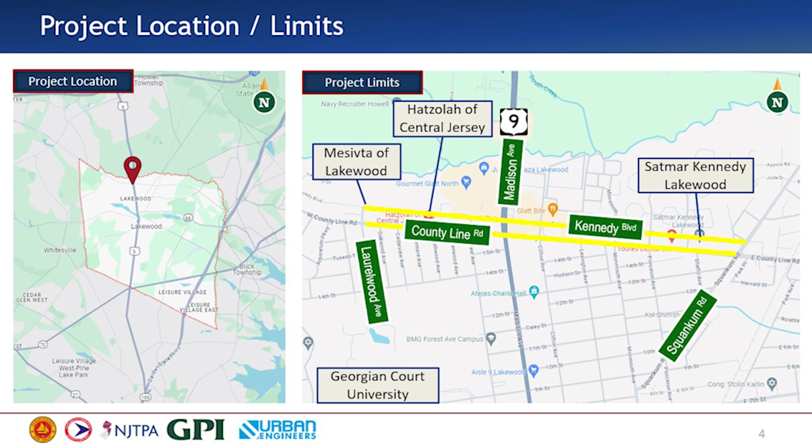The project area is a mix of residential and commercial properties. The project is based on the 2017 Transportation Model Update for Ocean County, which determined that both corridors would exceed their available traffic capacities this year. It included recommendations for adding through lanes along County Line Road and a two-way left turning lane along Kennedy Boulevard.

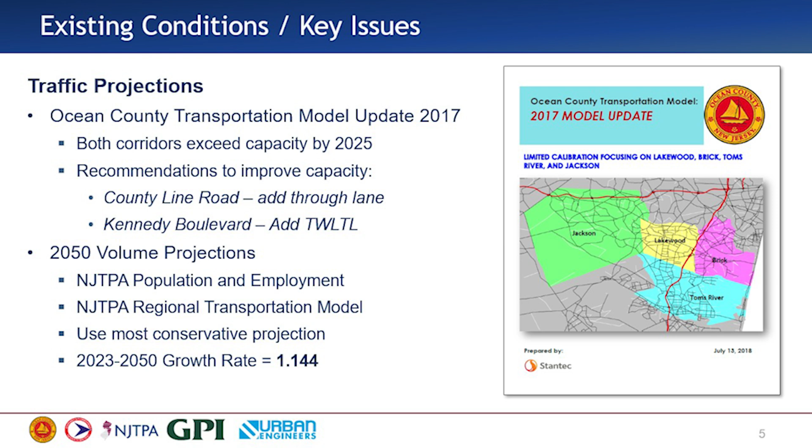Anyone familiar with Lakewood and the surrounding areas knows that there has been significant development and expansion, which is driving increases in traffic, both in the immediate project area and the general region.

As part of our project, we developed a traffic volume growth rate by comparing NJTPA population and employment projections, as well as the NJTPA regional transportation model projections. Using the most conservative figure, we developed an escalation rate, which was used to evaluate our alternatives out to the design year of 2050.

Within the project area, County Line Road consists of 4 and 2 travel lanes west and east of the intersection with Heathwood Avenue, with posted speed limits of 45 and 40 miles per hour west and east of Forest Avenue. The 2-lane section typically features a center turning lane to facilitate left turns on the various side streets.

Kennedy Boulevard consists of 2 travel lanes and is posted 30 miles per hour for the section between Lexington Avenue and Forest Avenue, with the remainder of the project area posted at 40 miles per hour.

In addition to the aforementioned traffic capacity issues, both roadways have incomplete sidewalk networks, as can be seen in this photo on the slide. County Line Road generally lacks shoulders which could be used by bicyclists, while Kennedy Boulevard features relatively wide shoulders but lacks bicycle facilities.

The signals along both roadways generally lack coordination, particularly with the state-owned signals at US Route 9. We also have aggressive driving throughout the project area, but of particular concern in the area of the 4-lane section of County Line.

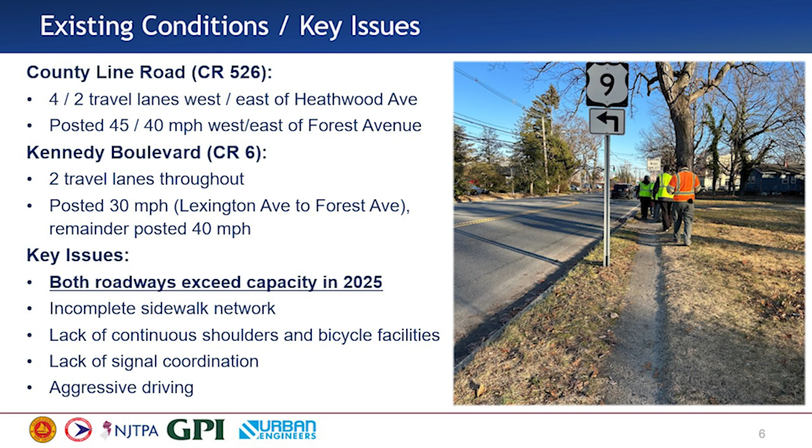In terms of safety, the project corridors had 1,088 crashes for the 5-year period from 2018 to 2022. Overrepresentations, which is a comparison of site crashes to the entire county roadway system, include right angle, rear end, sideswipe, left turn, and pedestrian and bicyclist crashes.

Of most concern are the right angle, left turn, pedestrian, and bicyclist crashes, as they tend to be more severe, resulting in injuries or fatalities. The project team performed a traffic data collection program in October of 2023.

We made sure that the counts were performed during typical weekdays and weekends, which do not coincide with federal, state, religious holidays, or local events. We also performed travel time runs and queue counts, which were used to calibrate our traffic model to reflect the observed conditions in the field.

Using the aforementioned volume projections, we developed no-build alternatives, which were analyzed for various design years from current day through 2050.

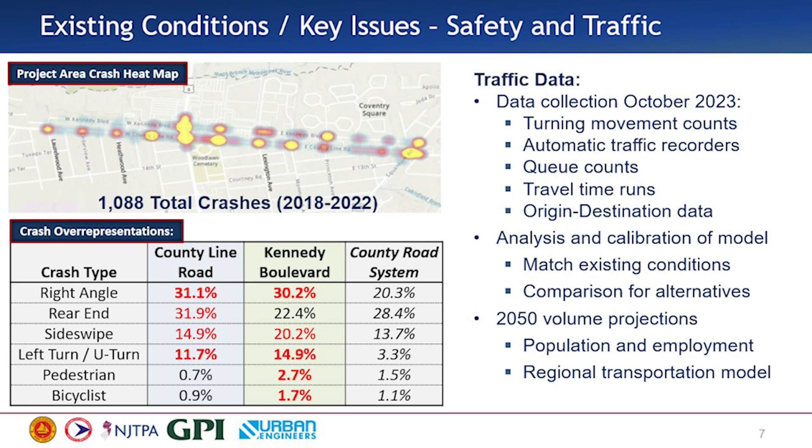To address the capacity issues along County Line Road, 2 through lanes are required in each direction. The project team briefly investigated the feasibility of widening the roadway to accommodate the required roadway cross-section, depicted in this graphic. Shown in green dashed lines are the existing edges of pavement for the roadway, and shown in red are the various structures which are in close proximity to the widened section.

Depending on location, County Line Road would need to be widened between 12 and 18 feet on each side to accommodate the required cross-section. Approximately 8 to 15 feet of additional space would be required beyond the roadway widening to construct necessary sidewalks for pedestrians and accommodate roadside grading. This amount of widening would likely require full right-of-way takings of at least 40 residences and businesses, as well as significant impacts to the Woodlawn Cemetery near the intersection with Route 9. These impacts would likely preclude this project from advancing.

In addition, safety may be further diminished due to the longer pedestrian crossing distances and left turns into and out of various unsignalized side streets and driveways, which would need to cross additional through lanes of traffic. This could increase the amount of pedestrian crashes throughout the corridor. Due to these concerns, the project team dismissed further investigation of the 5-lane section along County Line Road.

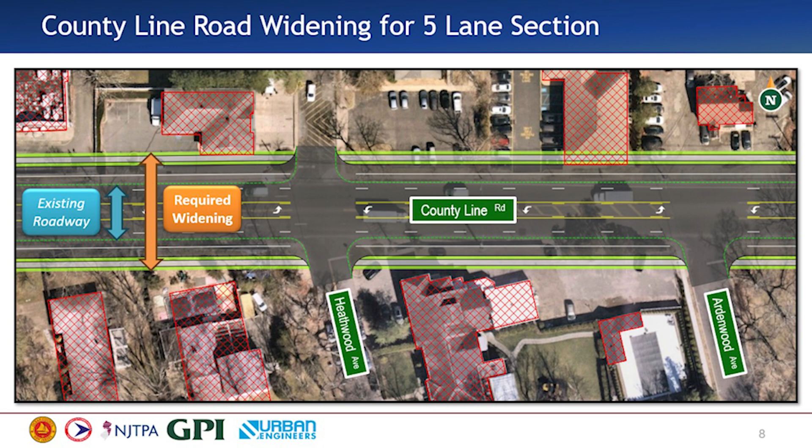To address the project's purpose and need, the project team investigated 3 primary alternatives along County Line Road and Kennedy Boulevard, as well as 2 alternate options for addressing their intersection with Squankum Road. Alternative 1 maintains the existing traffic patterns of the roadway network and improves traffic operations by optimizing the existing signalized roadway network. Alternative 2 converts County Line Road and Kennedy Boulevard to 2-lane, one-way roadways - County Line Road in the eastbound direction and Kennedy Boulevard in the westbound direction. Alternative 2 also proposes to construct on-street buffered bicycle lanes along both roadways.

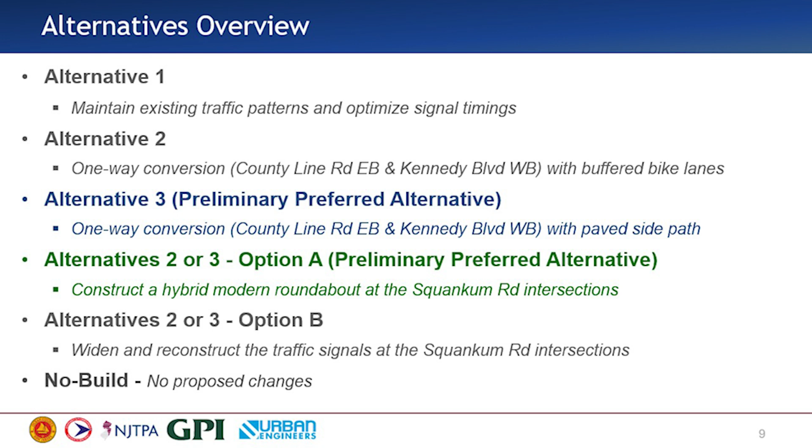Alternative 3 proposes the same one-way pair as Alternative 2, but with a separate paved side path, also known as a shared use path, which can accommodate bicyclists and pedestrians along both roadways. With these primary alternatives, we also investigated 2 options to address the one-way conversion at the eastern project limit with Squankum Road. Option A consists of constructing a single hybrid modern roundabout to replace the existing pair of signalized intersections, while Option B maintains the 2 signalized intersections, but requires widening and reconstruction to provide additional turning lanes to accommodate traffic. Lastly, we had the no-build alternative, which served as the baseline comparison for all other alternatives developed for this project. Today's presentation will only focus on our PPA, which consisted of Alternative 3 and Option A.

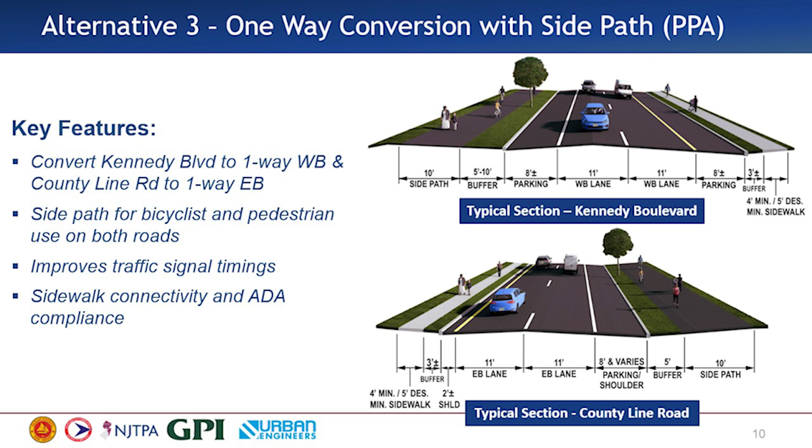We also identified advantages and disadvantages of each alternative. The PPA provided long-term congestion improvements, full pedestrian and bicycle connectivity, enhanced pedestrian safety, and shoulders which could be utilized for on-street parking. Disadvantages of this alternative included easements and right-of-way takings which would be necessary for construction of the sidewalk, side paths, and roundabout at Squankum Road. In addition, we considered that the wider side path may not be favored by property owners due to the additional snow maintenance.

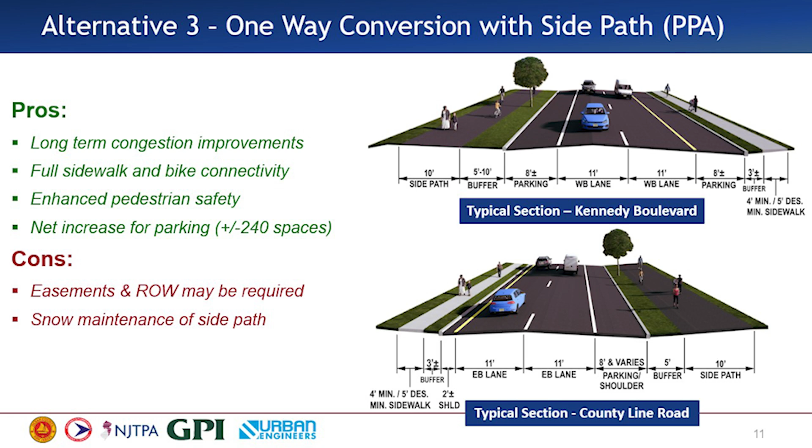By converting County Line Road and Kennedy to one-way, the need for dedicated left turn lanes was eliminated, which allowed us to provide a consistent cross-section throughout, as well as shoulders. This provides the opportunity to construct curb extensions at intersections, which improve pedestrian visibility, shorten pedestrian crossing distances, and keeps people from parking too close to the intersection, per Title 39.

The one-way conversion will require further coordination with NJ Transit following this design phase to relocate any bus stops so that they are set up for right-hand pickup and drop-off. Lastly, we're also looking at including channelization at various T intersections to reduce the potential for wrong-way turns under the one-way conversion.

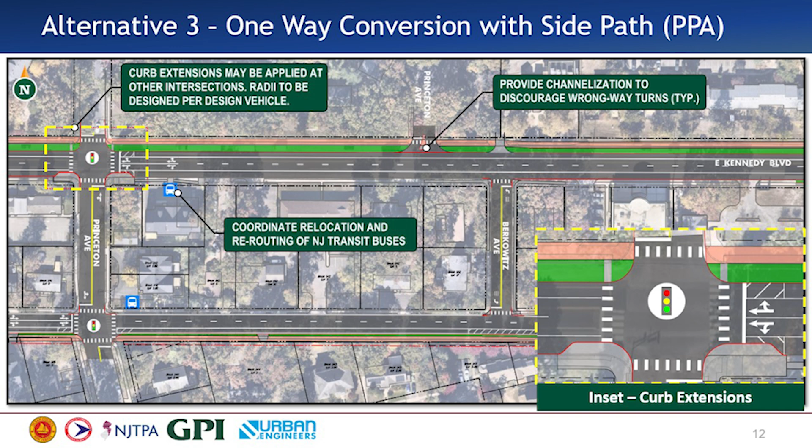Traffic approaching County Line from Laurelwood Avenue will have a dedicated right turn lane and a combined through-left lane. The right turn lane will operate essentially as free flow unless pedestrians press the push button to cross Laurelwood Avenue.

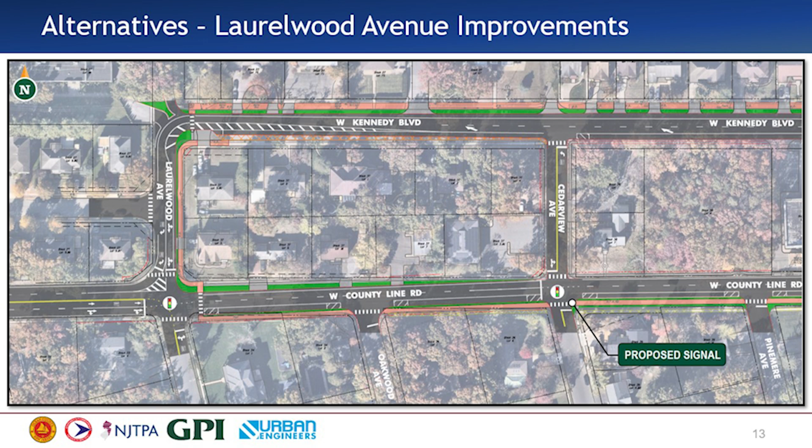Since Route 9 is under the state's jurisdiction, modifications to the intersections with County Line Road and Kennedy Boulevard will require NJDOT approval. Left turns from both directions of Route 9 will need to be accommodated from the segment between both corridors, so widening of Route 9 will be necessary.

A bus stop pull-off will be provided in the northbound direction, as it currently is today in the shoulder, and the southbound bus stop will be maintained in the right lane. In addition, proposed improvements at Route 9, both Forest Avenue and Clifton Avenue, will be reconfigured to provide dedicated left turning lanes and through lanes.

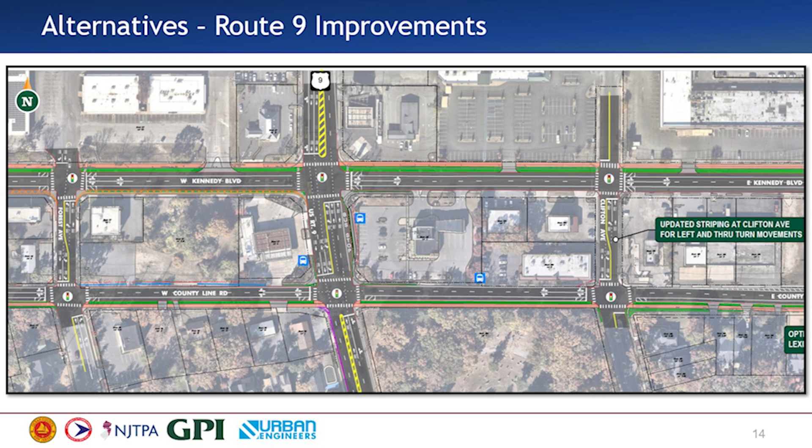It should be noted that a significant safety and operational benefit of the one-way conversion is that left turns from County Line Road or Kennedy Boulevard can be made without having to cross opposing traffic, reducing conflict points and improving operations along this corridor.

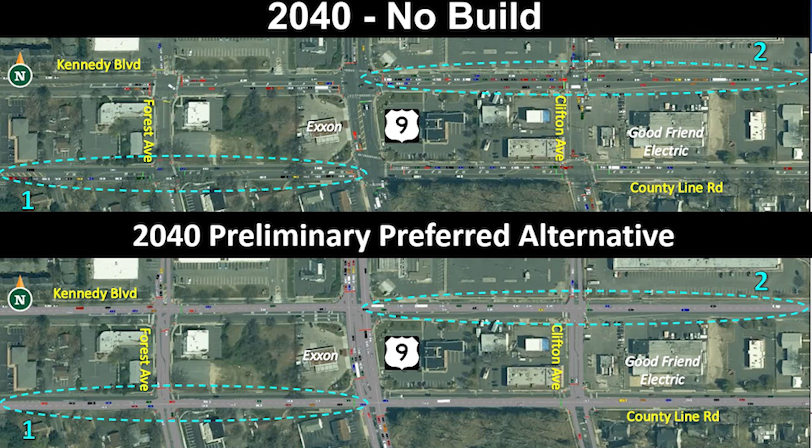For the one-way pair alternatives, two options were developed to address traffic operations at the eastern project limit with Squankum Road.

Option A proposes to construct a 5-leg modern hybrid roundabout to replace the existing pair of signalized intersections. Overall, the roundabout operates at a level of service D or better during all peak periods and better accommodates traffic through both peak and off-peak hours compared to a signalized option. The larger footprint of the roundabout does require two full right-of-way takings. The splitter islands along the east approach will require reconfiguration with the driveway access and circulation of adjacent commercial parking lots.

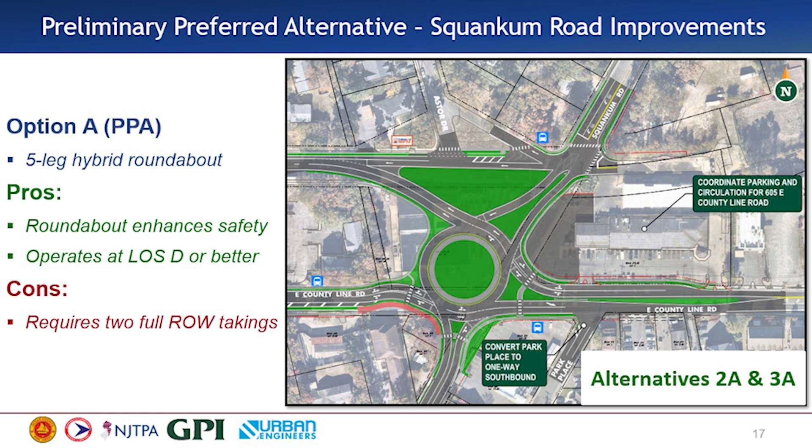The project team recognized that local officials, stakeholders, and the public may have reservations regarding roundabouts, which would need to be addressed during our public outreach to earn their support. We prepared a simulation video to demonstrate the operational benefits of the roundabout and provided additional information during outreach to highlight some of its safety benefits as well.

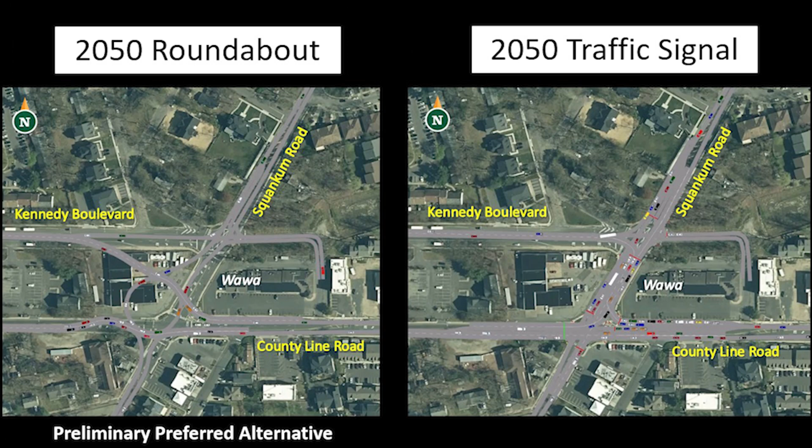As you can see, the roundabout option outperforms the signalized option during the worst-case peak hour. Another advantage of the roundabout for this specific location is that it will better mitigate potential wrong-way movements from the one-way traffic along County Line Road East.

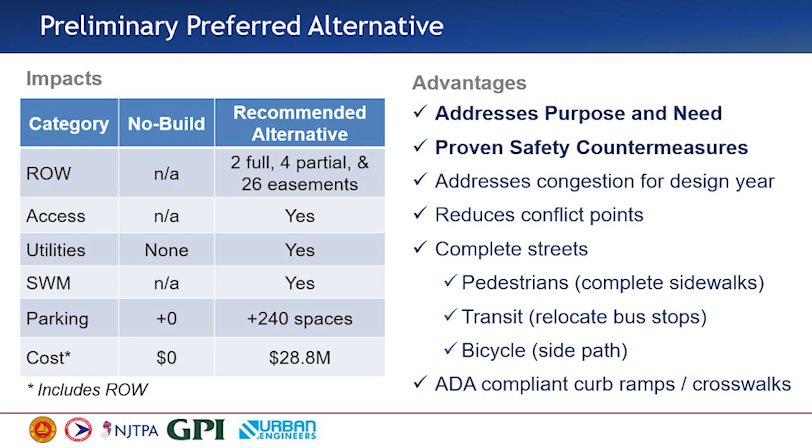Through our alternatives analysis and public outreach process, we developed a PPA which addresses the purpose and need of the project and incorporates FHWA proven safety countermeasures. We are able to better accommodate future traffic volumes while also improving safety and accessibility throughout the project area for all road users. With the proposed improvements, there are several impacts which we considered and quantified in our alternatives matrix, including right-of-way, access, utilities, stormwater management, on-street parking, and overall project cost.

Public outreach consisted of various modes of engagement throughout the LCD process. Two sets of local officials, stakeholders, and public information center meetings were held, once at the beginning of the project and development of the purpose and need statement, and once towards the end of the project to solicit comments on the alternatives and PPA. A project website was developed along with a dedicated email account for soliciting input from stakeholders and the public. NJDOT subject matter experts are also reviewing the project since it is federally funded and it intersects with Route 9, which is under NJDOT jurisdiction.

Lastly, the project team requested resolutions of support from Lakewood Township and Ocean County to help the project advance to the next phase of design.

A project website was developed which served multiple purposes: it provided background information on the project team and delivery process, served as a central location for providing updates, meeting notices, meeting recordings, and project-related resources, and lastly provided a single location where the public could provide input or ask questions for the project team.

We also developed a community input survey, which was mailed to residents and stakeholders within the project area and made available to fill out on the project website. The survey asked residents how they typically use the roadways, what issues they felt should be addressed, and what potential improvements they would like to see as part of the project. This input was collected prior to our initial outreach and helped the project team develop and refine the purpose and need statement.

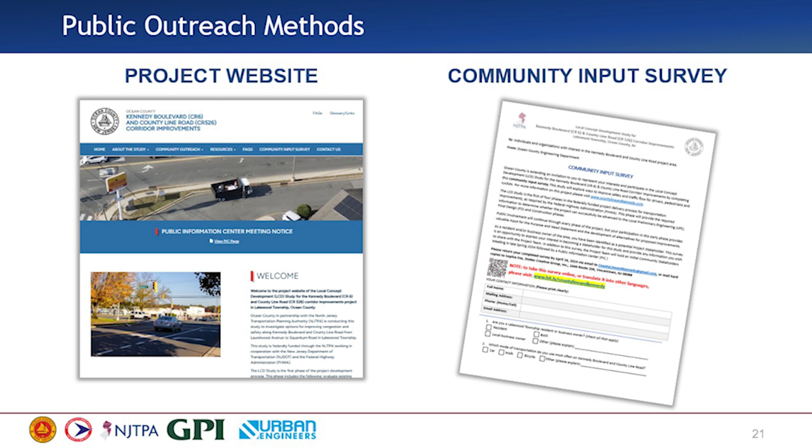Additionally, the project team hosted a fieldwalk meeting with representatives from NJTPA, NJDOT, Ocean County, Lakewood Township, and the consultant team early on in the LCD study. Similar to a road safety audit, the meeting was intended to solicit input from a wide range of backgrounds and perspectives and help the project team identify potential issues and opportunities for improvement. This meeting also helped introduce the project and project team to various local officials and stakeholders prior to our formal public outreach.

Two public information center meetings were held during LCD. The project team advertised these meetings using mailers to residents and stakeholders, handouts to local businesses, installing yard signs throughout the project limits, running advertisements in local online newspapers, sending email blasts via the project website and email account, and providing notices on NJTPA and Ocean County social media accounts.

The first PIC, intended to solicit input on the draft purpose and need statement, was held online, and its recording was hosted on the project website to accommodate anyone who could not attend.

The second PIC, intended to present the alternatives and PPA, was held in person at Lakewood Township's courthouse. It was held as an open house format where attendees could come up and view the project plans up close and discuss the project with the project team members one-on-one. We also set up a project simulation video running on repeat on TV screens so participants could view that and discuss with the team as well.

Halfway through the PIC time slot, we made a formal presentation to further explain the project, the background, purpose and need statement, project delivery process, funding, and timeline.

Throughout our various public outreach methods, local officials, stakeholders, and the public provided insight into the key safety, operational, and accessibility issues that the project team needed to address as part of this project.

Number one on the list was addressing congestion, gridlock, poor signal coordination, as well as the lack of turning lanes at key intersections. The proposed one-way pair addresses this.

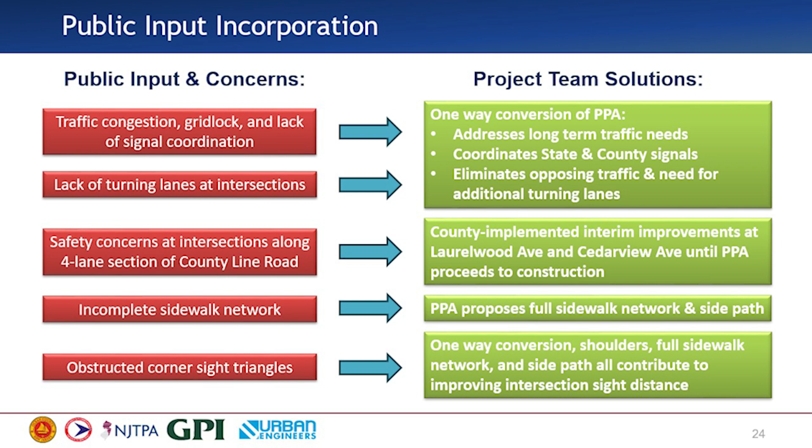So through a robust public outreach campaign and alternatives analysis, the project team was able to develop a preliminary preferred alternative which addresses the safety, operational, and accessibility issues along County Line Road and Kennedy Boulevard.